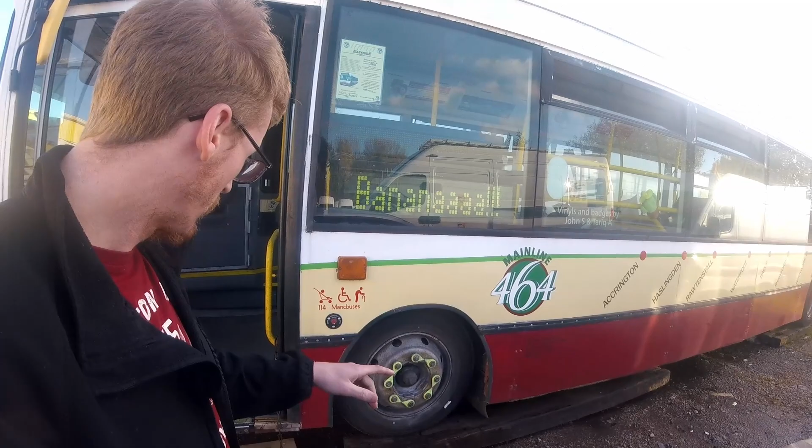It's been a while since I've been here and it's a very cold November. There's not really too much I can do. I've just seen in the previous videos we did look at the chassis. However, we're still waiting on Sean to sort the chainsaw out that he's borrowed, so we can chop these up to get a bit more height, because without running the bus it's a bit low. The other thing is today it's a little bit damp under there, unfortunately one of the issues with being where we are and not on hard standing.

I am going to try a little bit of an experiment. I'm going to remove the back seats again and hand pump the fuel up for a little while. If it starts straight away, we know we have air in the system, which is what we actually suspect is going on, which is why it takes time to start. The other thing is, with it being cold, it'll be good to run the engine, get it up to a temperature, bring some temperature in here, because the windows have been left open for some reason, don't know why, but it will give a little bit more of a clue what's going on.

So let me get these back seats out again. Have been removed. Now the other thing that I want to really start cracking on and doing is actually deep cleaning this bus properly, because just look at the state of that.

It's absolutely minging. Now these, they've now seized themselves in, which they appear to have, so I'm going to need a flathead screwdriver. I think flatheads is something we've got loads of, we just don't seem to have many Phillips anymore. Oh look, flathead screwdriver straight away. So get these undone and we can get down to the lift pump nice and easily. Just start them and then they'll come undone by hand quite easily.

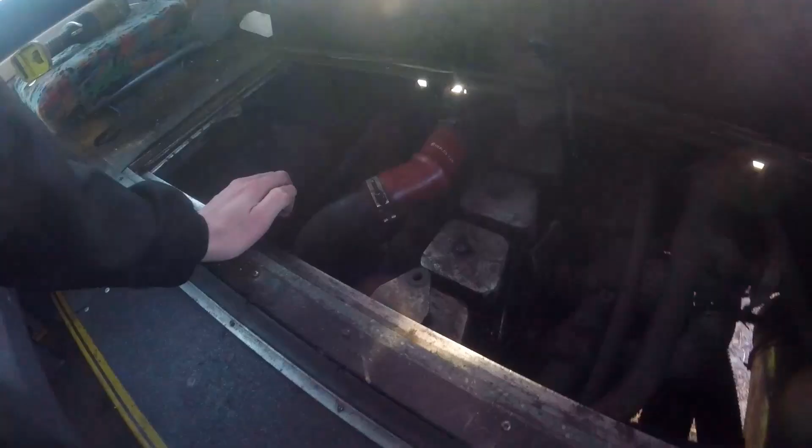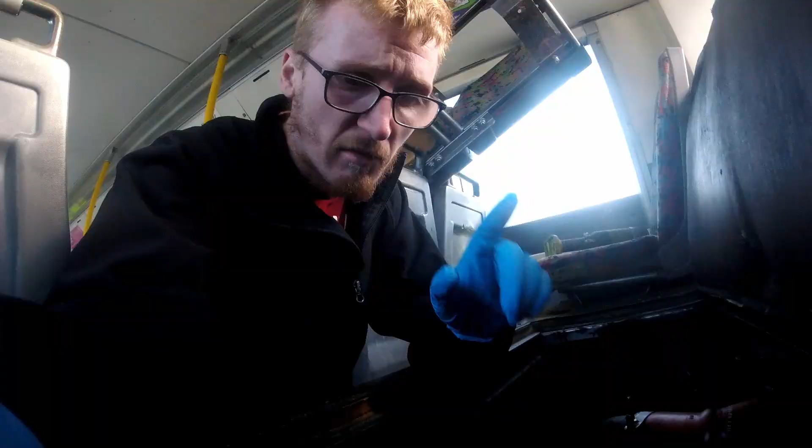It has been raining and there is some liquid in here, but what is this liquid? It's oil. I wish I hadn't done that now. So I take it that these two are leaking. I've donned some protective stuff, so yeah, I think it's this one that's leaking the most. Not too sure, but it's definitely leaking because there's oil everywhere.

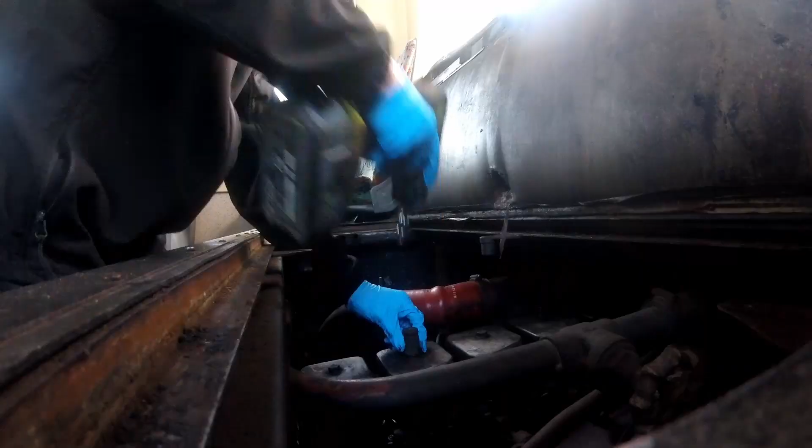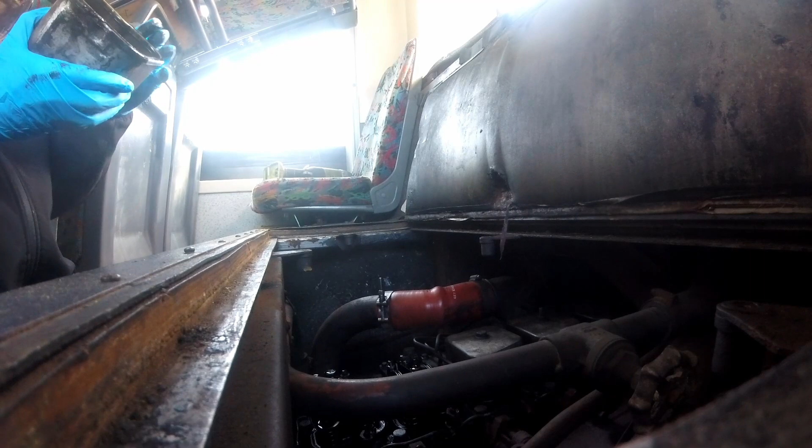Seal's probably just not sat right. Let me have a feel round. The seal is there. I'm not too sure on that one. Speak of the devil, I can get them off. So let's just unsettle these two. See, that one pops up quite easily. Seal looks good on that though. Pop this one up. That's the same, the seal looks okay on it, but you can definitely see I think it's this one.

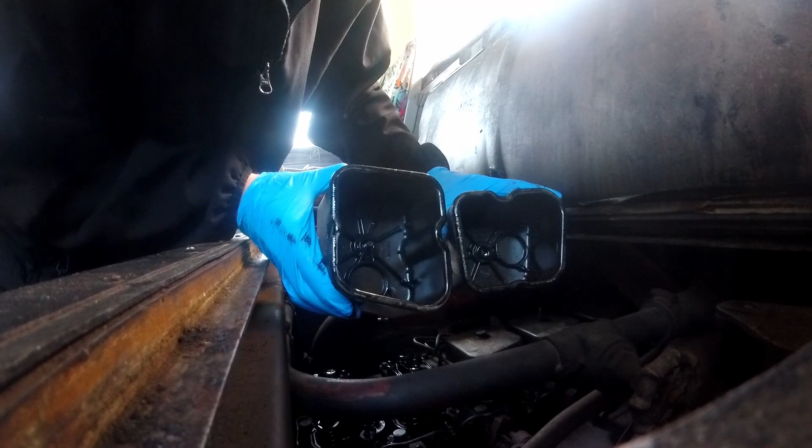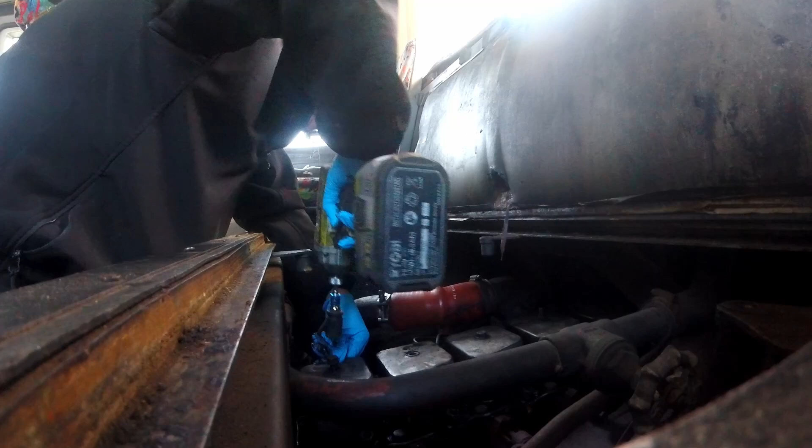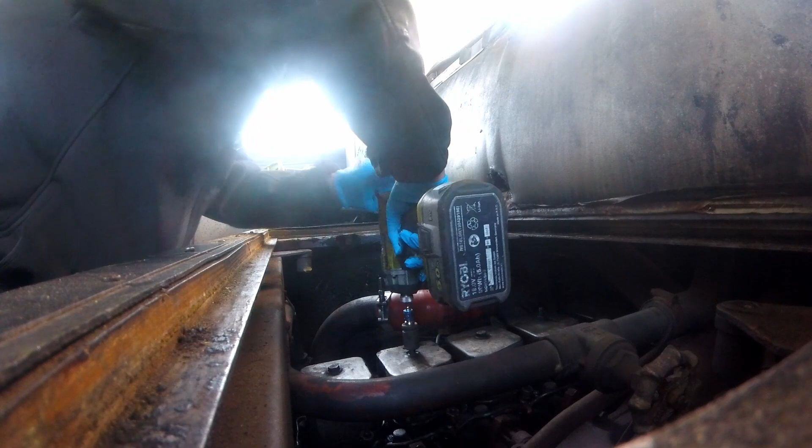That they've both been doing it by the looks of it. They might have just been slightly off, which is why they leaked on that one there. Good one down. They may have sat a bit better, they might not.

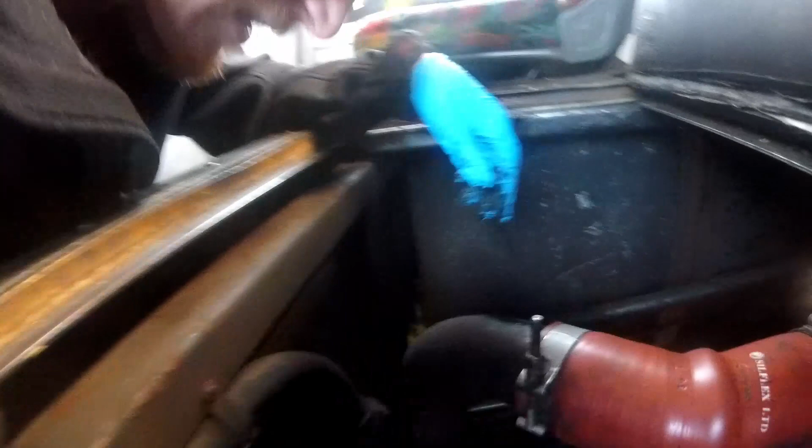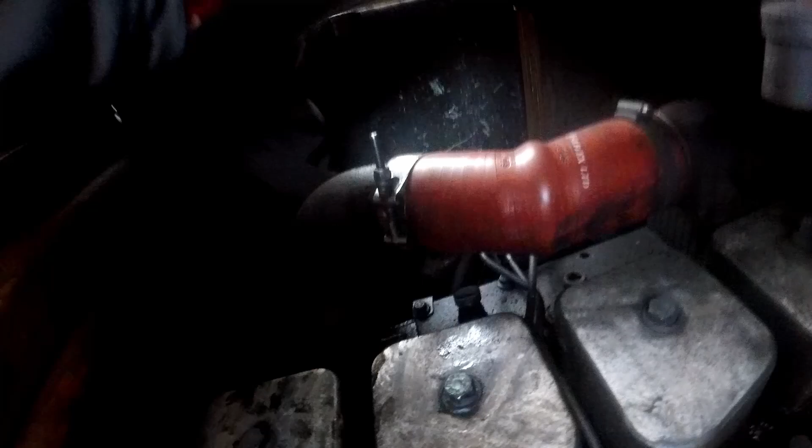Right, anyway, so on the Cummins 6BT there is a lift pump which you've seen us replace, which is down here, and to get fuel up you just press the lever on it, and if the engine is in a good position, which it isn't, you'll get fuel to come up. So to get the engine in maybe a bit better of a position, we'll give it a quick flick on the key and it will rotate the engine, and hopefully the lift pump will be in a better position.

Yeah, I can now pump fuel, there's resistance there. I've been doing that for a while and I've still not really got very good movement on the pump. So I'm just going to give it another quick kick. It might even just fire up because it's got a bit of fuel up there.

That might not... so let's see if I've got a little bit more on there now. Well, that's better. Let me go, that's in a better position now. Just filling it up, I can hear the fuel moving about. I can also hear it filling.

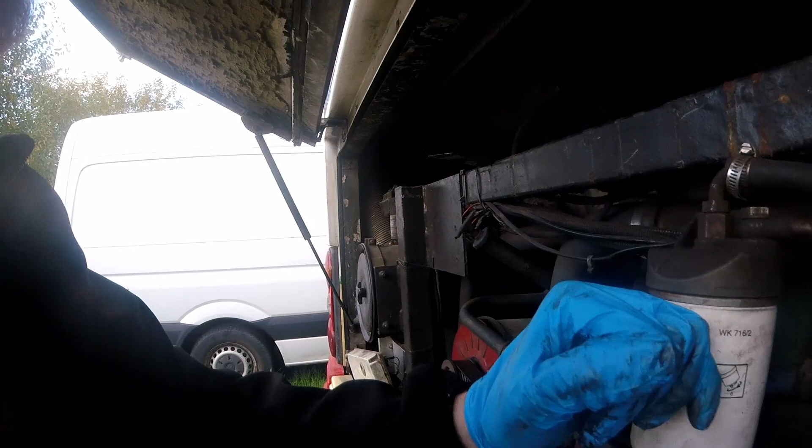I've got a sneaking suspicion, guys, that this is our problem here, this. So I'm going to take this top one off. Let's have a check at this washer, because I think I replaced that washer. I'm wondering if that's not making a good airtight seal, in which case it's made enough seal for fuel but not for the air. So let me get a flathead.

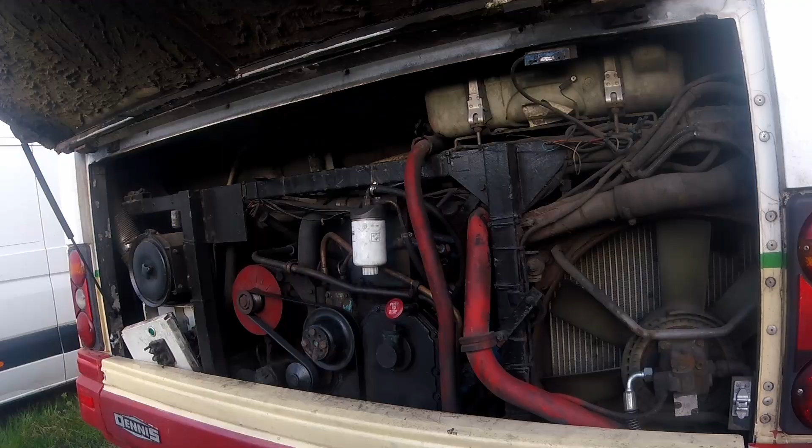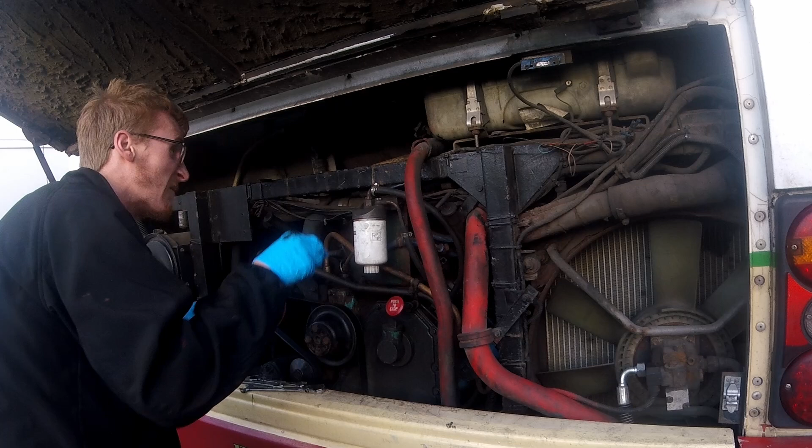Right guys, I don't know if this is going to work well because the GoPro's just resting on the tripod. I've said it many times and I'll say it again, we need more mounts, we need better camera equipment really. That'd make all the difference. But budget's a budget, and it's something that's not in the budget.

Fortunately, that's off. I've got to get that off there without taking it off the fuel pump. So when it comes off the fuel pump, it's bringing the joints in. Well, that weren't going to leak, was it? It's got to be truly on there. What size is this? Ah, it's a good job I brought a 17. I wasn't going to bring a 17.

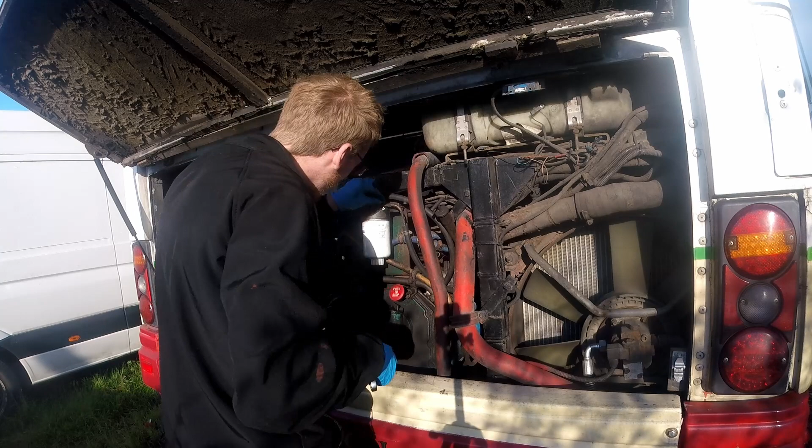Yeah, you see, we've got air here. Well, the fact the air came out there, I'm going to go with that is actually sealed. It didn't come out until I released it. There we go. So we'll do a little bit more hand pumping and see where we get it. I've got a feeling our problem is somewhere here, because the fuel's running all the way back.

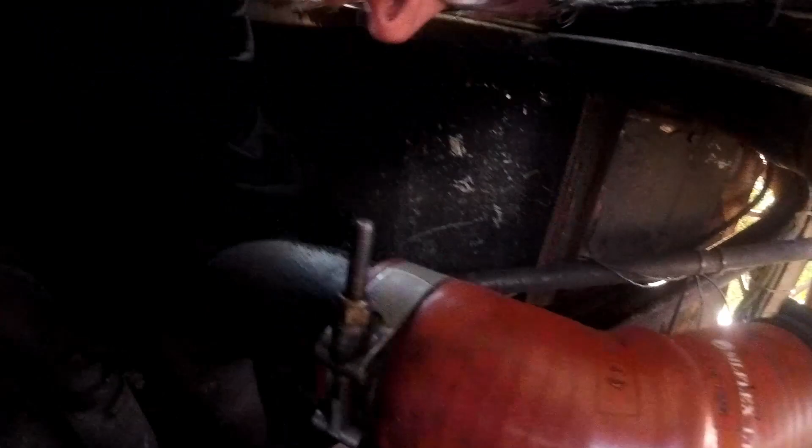Back to the pump here, there's a bit more light now. I'll turn the audio up, can you hear it? More now out of that pump. So we'll just quickly go check the filter, make sure that's not leaking now. I've messed about with it a little bit, and then we'll hit the key.

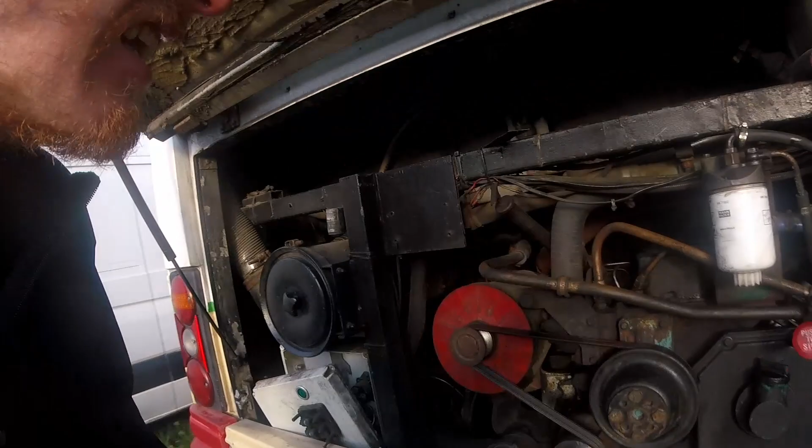Hopefully it should just fire up into life without too much cranking. Hopefully. So yeah, we're getting no more out of there. So just give it a go. Might need a little bit of cranking and a little bit of persuasion, but we'll give it a go. Into the cab, isolator on, key on, and turn that off because we're running out of battery power as it is.

Just leave the fuel pump on a second, pump a little bit more. Engine's not in the right position. Bloody lift pump, can't we just have an electric one?

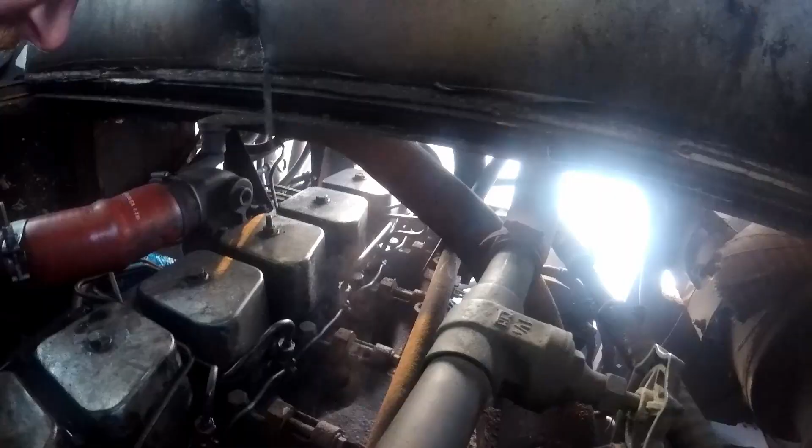It's a bit smoky outside. Now, before the do-gooders do good, you'll find that this is condensation, and the fact that it's just burning unburnt diesel, basically. So give it a couple of minutes and it will clear up again.

We definitely have fuel in the system. It's one of the world's biggest vapes, isn't it?

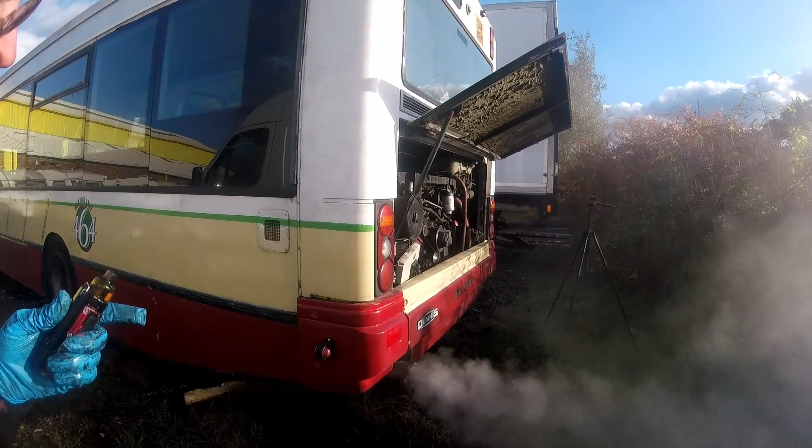You can hear it, it's not on all six. You hear that random beat every now and again? It's missing, every couple of rotations it's missing a beat. It's firing, and then it stops firing, then it's firing, stops firing. Listen.

Definitely not running on all cylinders. Oh, and the doors have shut, or they're trying to, so I can't get back in until the built up pressure. It looks like a 1997 transit van.

It doesn't help because of the colder air temperature as well, because the exhaust will be getting hot, but it'll clear up.

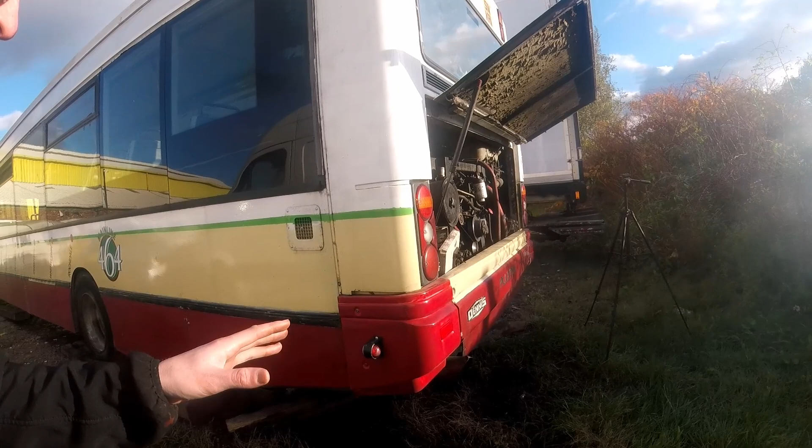Don't forget the sun adds to it. If you actually look at the exhaust pipe, it's clearing up. Good. So on that note, let's get our 17mm spanner, some gloves on, and let's see which injector it is that doesn't want to work properly.

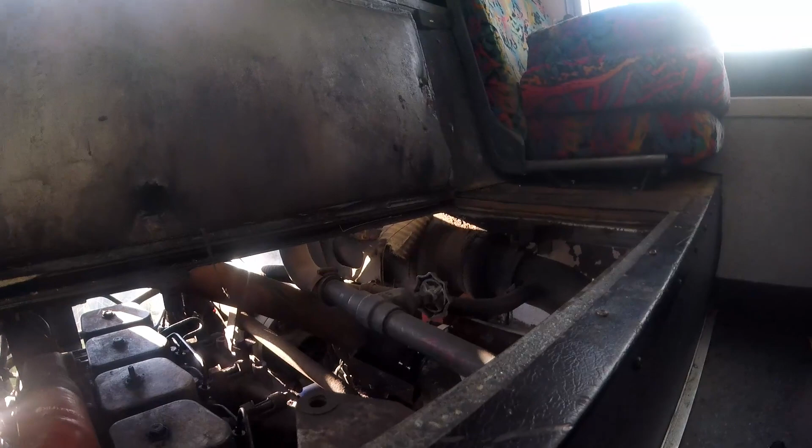So, 17mm spanner, we're going to undo these one at a time. If it changes the engine tone, then that injector's doing something. If it doesn't change the engine tone, the injector's doing naff all. So let's start.

Just going to put you there. So this is injector 6.

Definitely does something, all the extra smoke now. Different place to leave it. Injector 5.

Nothing. That injector isn't doing anything.

Injector 4. That's doing something.

Injector 3. That's doing something.

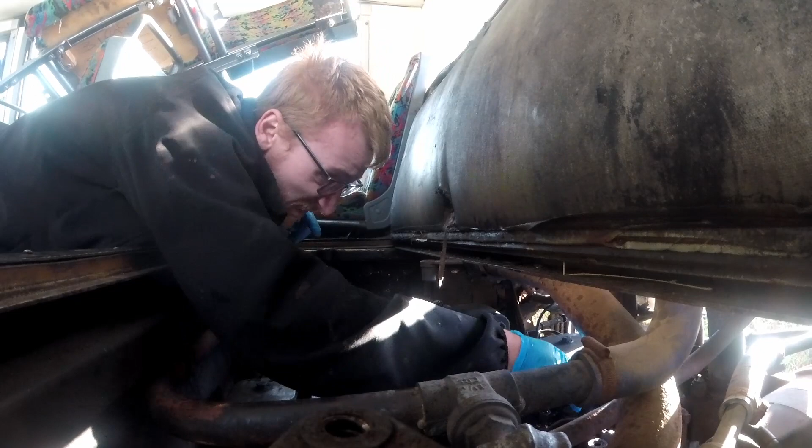Injector 1 I've got to do from the outside, so give me 2 seconds while I shout. So injector 1 is doing very little, very little, and injector 6 - no, not 6 - injector 5 is doing naff all.

So that's 2 cylinders down out of our 6-cylinder engine. So essentially we're running on 4 cylinders. Now it might change as it gets hotter, but we're still smoking the place out. But 2 cylinders down.

The way you can tell whether the tappets are working or not is by taking off the cover. So this is the injector that's not working. As you can see, the tappets are going up and down perfectly fine, they're free, they're moving. So it's letting air in, it's exhausting it, not a problem.

What's not happening is either the injector is not injecting the fuel into the cylinder properly, or the compression in the cylinder is not good enough. And personally, I'd lean with that injector or the fuel pipe.

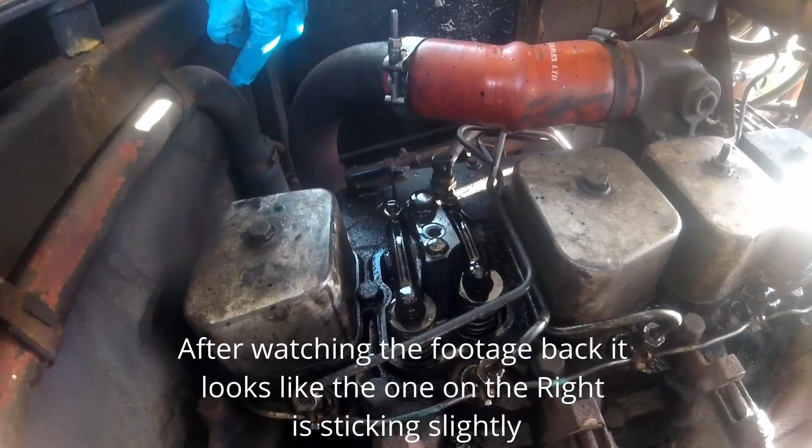Now let me just put it all back. Now on this bus somewhere we do have a full set of new fuel lines, so they can go on. But I think we need that injector testing, and we need one in testing as well. Possibly a compression test on 5 and 1 to make sure that we do actually have compression, and good compression. If we have good compression, then the only thing that's left out of the entire thing is the injectors.

And it's probably why it's a bit difficult to start if we're 2 injectors down, because it's then relying on the other 4 cylinders to knock the engine over. And because 1 and 5 are opposite in the sequence, there's quite a gap where the engine's not going to have enough rotational momentum to get going without the starter motor.

So I think the next step for this is going to be a compression tester. I'm going to have to test the compression. I think 1 is very good, because the injector, when we first took the injector out, it was stuck, and we had to use the compression of the cylinder to pop the injector up now.

Number 5 has always been dead loose, so it could be the sleeving on 5 causing the problem, but there's no blow by, so it's sealed. So it could be the injector not injecting the fuel correctly, or the compression's not very good.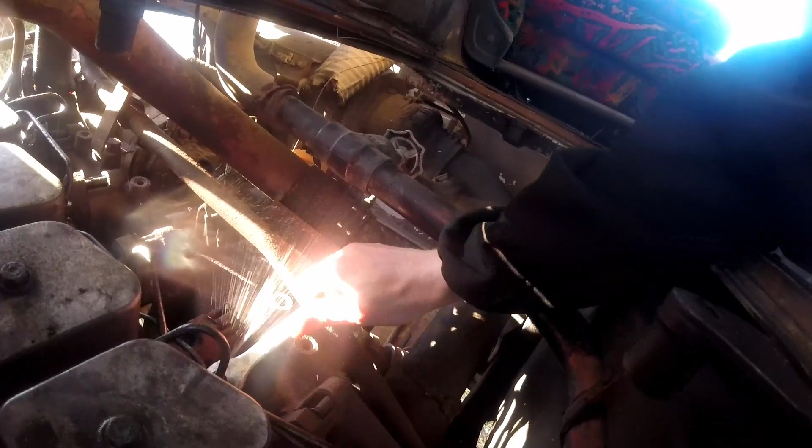So now the engine's warmed up a little bit, let's just check that injector again, the cylinder, and see if we're still in the same boat. So when I do it to that one, that injector is doing 3.

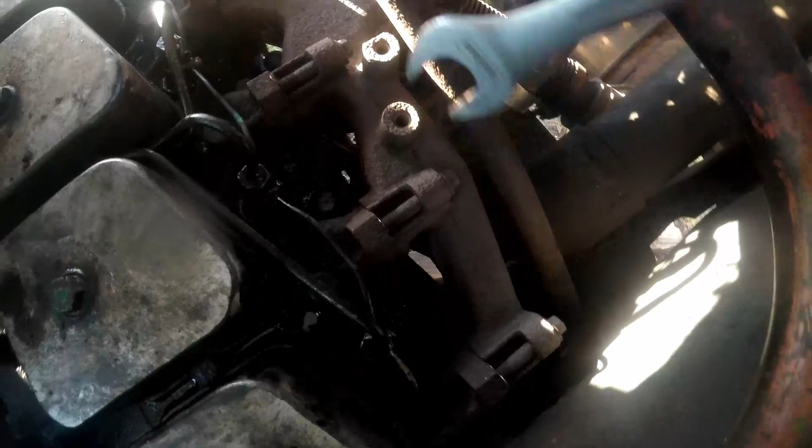No wonder we got a lack of power and it doesn't work properly. We've got a 6-cylinder engine running on 4. I mean, it shows it'll run on 4. It might be running on all 6, but very poorly on 2 of them. So when you put your full throttle down, it's just not producing enough.

The retarder wires, which are cyan, slate and yellow, came up to the dashboard, which they're supposed to. Then they're either meant to be shorted together or separated, whichever way, to tell the gearbox whether the retarder needs to be active or bypassed. If it's being bypassed, it drives normally without a retarder. If it's on, the retarder's active.

Now the wires came from the dashboard here, went into a block down here, into a fuse, and then back up, and gave a reading of 5 volts. However, I then took the switch off the other dashboard over there, which is the retarder isolation valve switch, and when it's unisolated, so in the mode it's in now, you get 0 volts. When you're in that mode, which is retarder isolated, you get 5 volts.

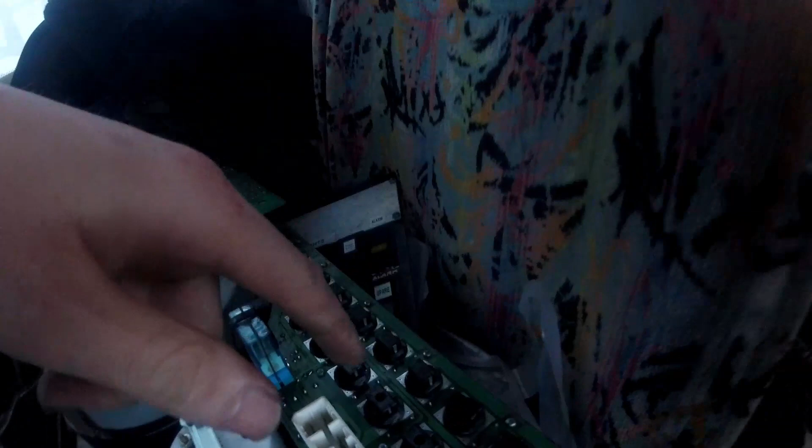This side's meant to be 26 volts or 24 volts. This side I believe is meant to be negative. I'm going to pin it out on here to find out properly, right? But both sides of the light are getting 24 volts. So the bulb is just acting as a fuse. It's never going to light because the bulb needs both negative and positive.

So I don't get why that doesn't work, or where it's getting its voltage from. I need to look a bit further into that. But the switch signal to bring that light on is getting up there. If you take the handbrake off, one side of it that was 24 volts goes dead and the other side stays active. So according to this diagram, which might as well be made out of gibberish, 17 comes in here. So 17 is Aladin pin 30, which could mean anything.

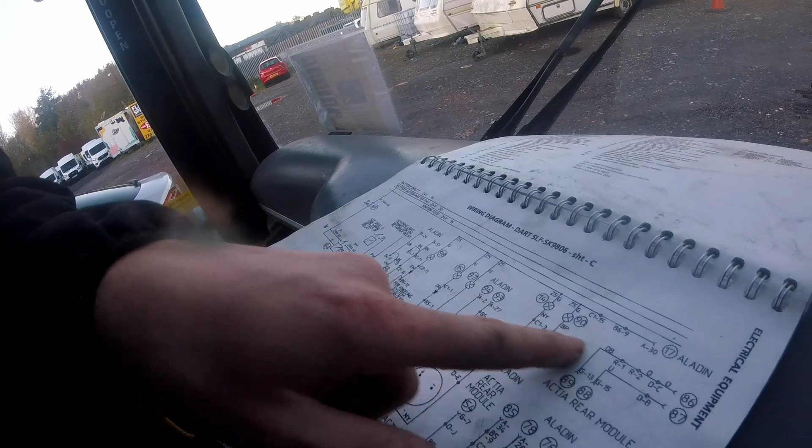It shares a path with all these warning lights. So 15, pod door, which works. 97, low air pressure, which works. 14 and 90, no charge warning light, that works. And what was the other one? 90 is high coolant temperature. We've never tested it directly, well we have, we've shorted it at the back and that works.

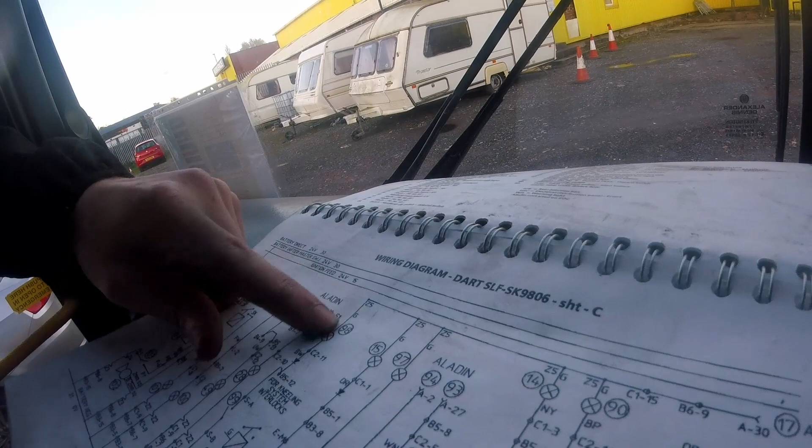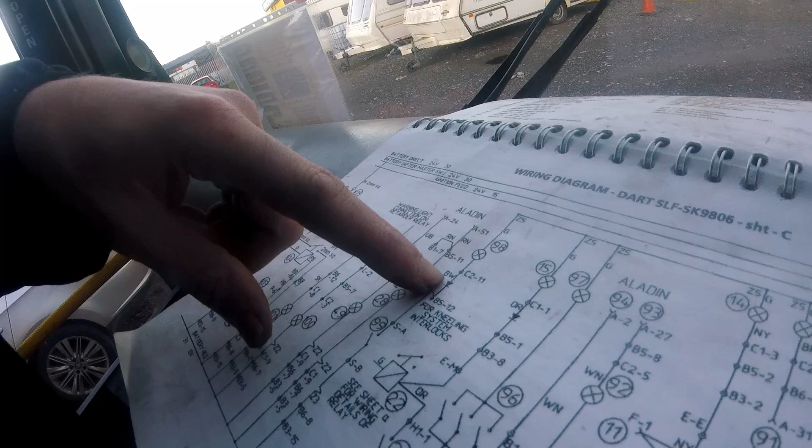So we know this rail here is good. Then it comes in here through a connection block to 98, which is the warning light. Handbrake on warning light. It then goes out of there via a black and white wire through a diode for the kneeling system's interlock.

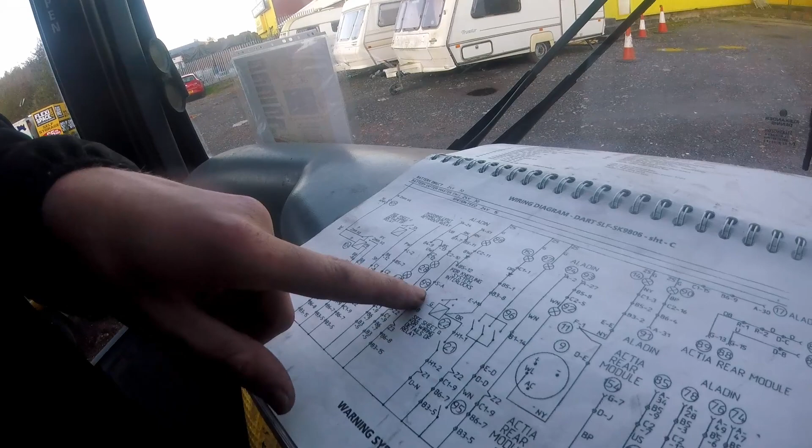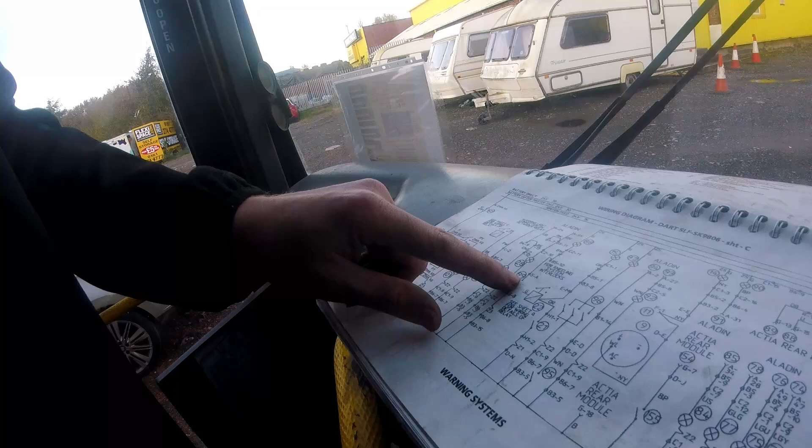This here is from the negative, so the handbrake, and is supposed to switch that into there, but it comes from the 0 volt rail. I thought that was the bus for a minute. No, it's the multimeter. So that comes from the 0 volt rail into there, and then across.

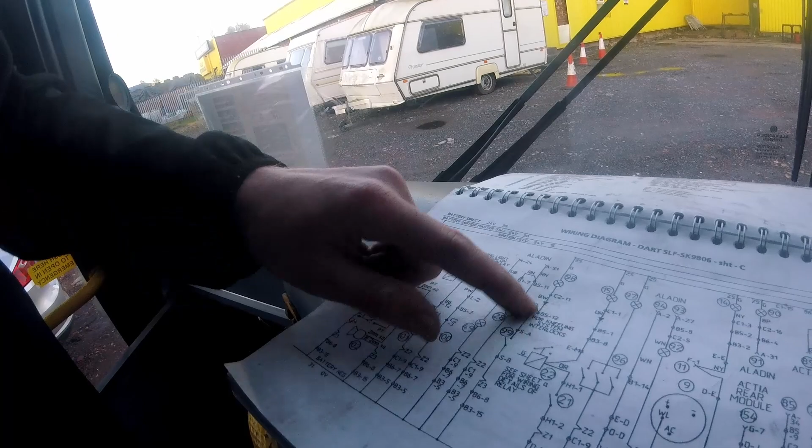My guess would be wherever this diode is, that's what's at fault, because it's reverse feeding 24 volts that's meant to come down for the negative. And then you go to the kneeling system, which is here, 99.

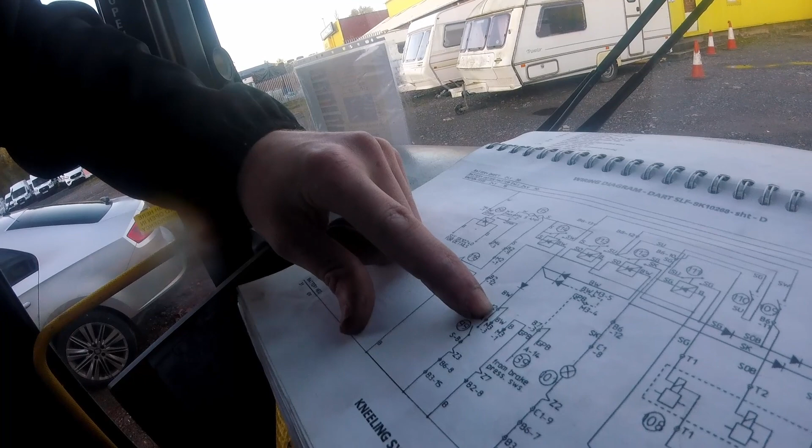Make sure 99 is still the handbrake. Yep, handbrake switch control valve, and that's where it joins. So then there's a diode that goes up to 114, which is the relay kneel inhibit handbrake off.

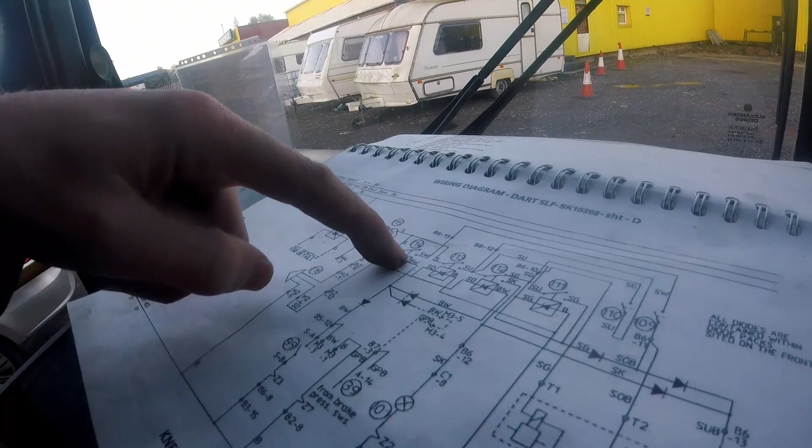Now that's one thing I've not tested, so let's just see - when I'm going to have my foot on the foot brake, I release, it comes kneel. That's return, so that's kneel, that one there. Take the handbrake off, and it won't kneel. So this is getting the right signal that the handbrake is off. So this circuit's been made.

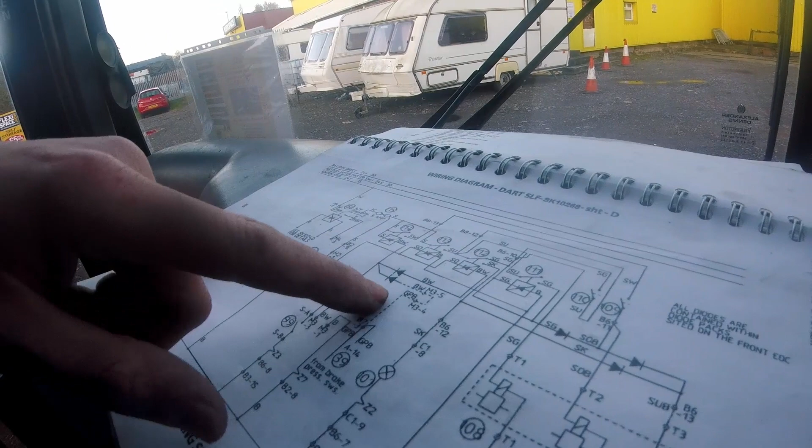That's where that one comes in, the black and white wire from above. This circuit has been made, so the only thing that can be at fault is here, I reckon. But there's a few other things that feed in here. So from brake pressure switch 39 - what's 39? Negative switch for inputs for brake lights. So that also feeds into here.

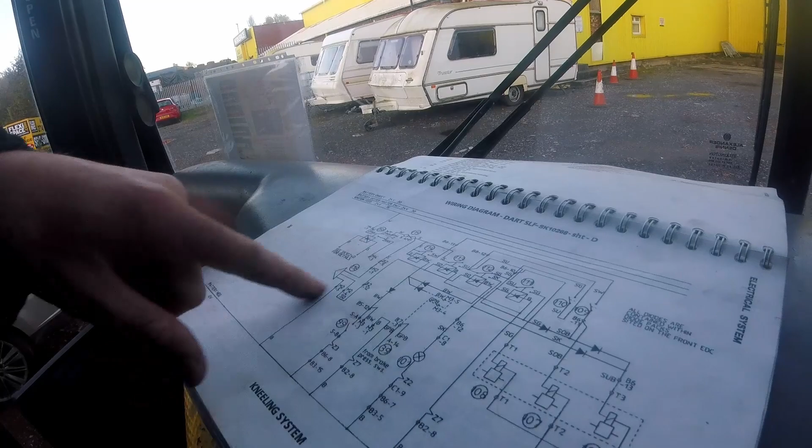But it also gets a feed from 112, which is the relay raise handbrake off, which does work. I am wondering if there is a fault on here which is then causing this to malfunction as well. Because 116 - what's 116? It's the sensor for the kneeling system, which is below. But all this works.

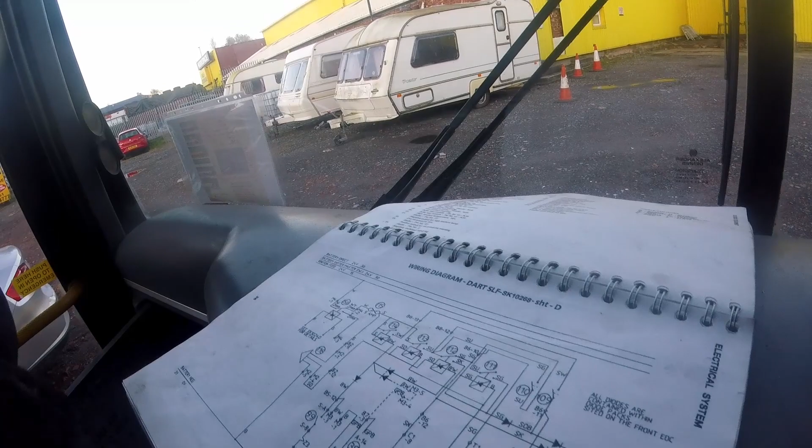111 is the relay to raise. That works, I've just proved that. I've just triggered the relay, which is on the switch. So that works, all the solenoids are working. So the fault has to lie here, or there, or there.

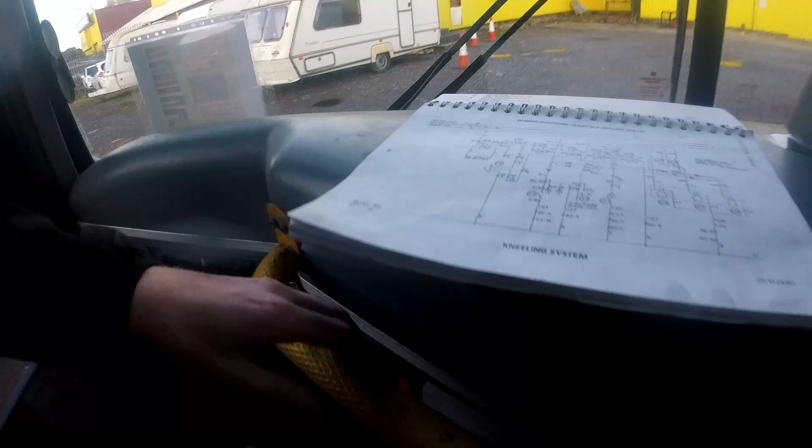Now the black and white wire with the diode, I reckon if I manage to find that and take it out, it might work. Now we could isolate the system by doing kneel inhibit off, raise sensor off - so that's turning the sensor off underneath - and raise handbrake off. It's not done anything, and raise. None of them have made a blind bit of difference, but I'm pretty sure they all should be diode relayed.

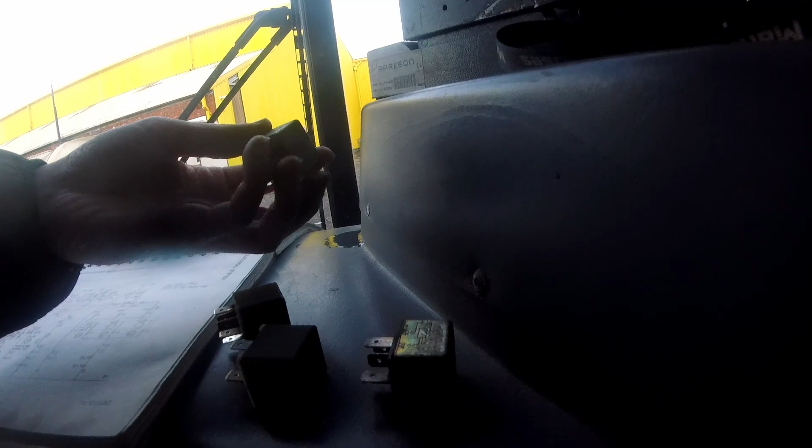And those, I believe, if you look at the diagrams - oh yeah, they are, they've all got the diodes in. So we've got to trust that all these are good. Now we could swap them round a bit.

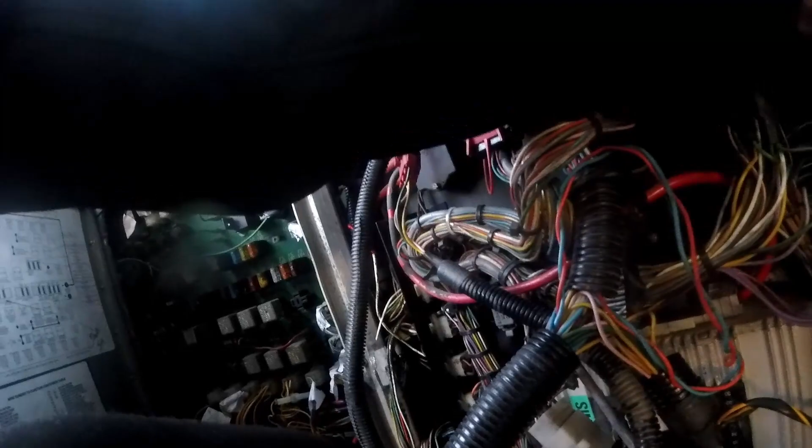So raise, and then put that one in the kneel inhibit. It's the last bit of the video as well, guys. So kneel inhibit is currently active, so I shouldn't be able to kneel it, but I am. Oh yeah, it breaks the relay, doesn't it? Right.

Raise on sensor, I can't get it in, do it from this angle. I can actually see what I'm doing then. There we go, so that's been told to raise now. There's a few diode packs here, but I don't know what they're for.

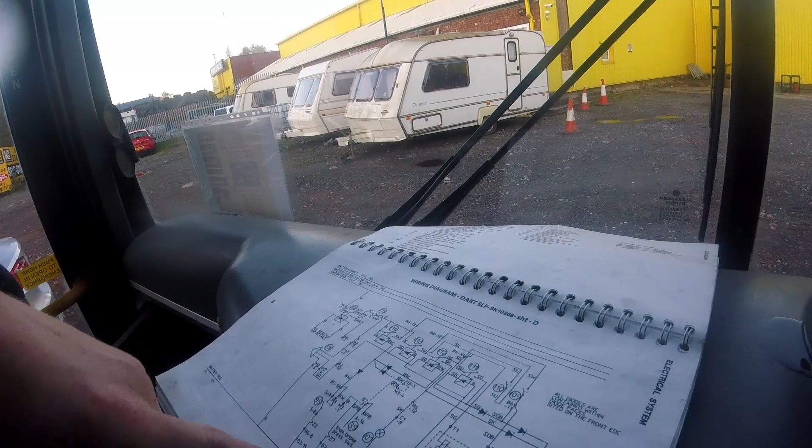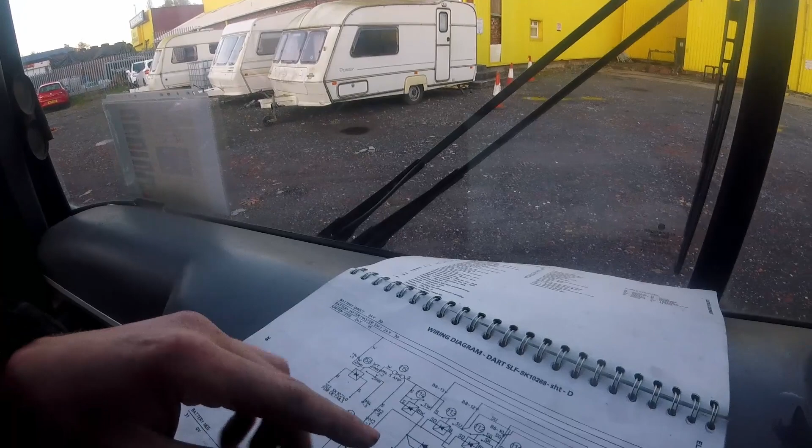So I think we're going to have to trace that white wire out of the dashboard and see where it goes, and trace it back to see why there is 24 volts flowing up here when there shouldn't be, because this is negative, but the 24 volts is flowing up there. Why? So I'm going to have to look at this on the computer at home, and I'll try and suss it out, but hopefully we should get somewhere now.

But anyway, fucking thing. Oh, we've stopped smoking.